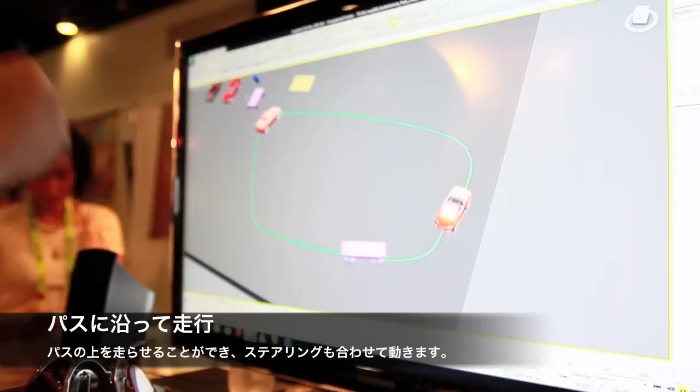And you can put cars on a path, and you will see the steering works automatically on the path. So you can draw any kind of spline and the car will correctly steer. You just have a speed for the car and then it will follow your path. So you can have a city simulation, have cars following a path, and steering, suspension, everything will work.

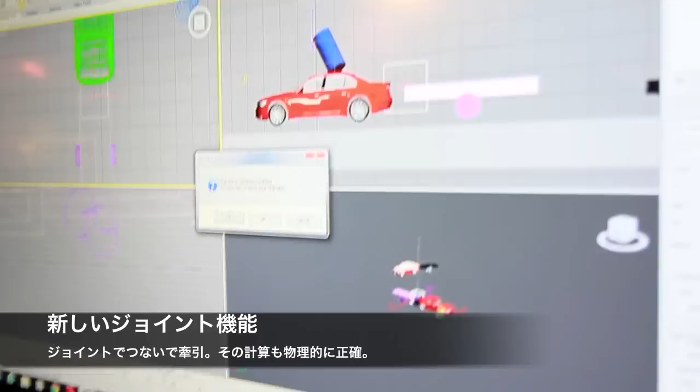We do support trailers, so you can have trailers with 2 wheels, 4 wheels, or as many wheels as you want. You just use the new joints where you can attach trailers to the car, and then you can have a camper or a huge truck and all kinds of stuff. Everything is physically accurate, so you have also the shocks and suspension as well. You can put unlimited trailers, so you can create trains and everything you like.

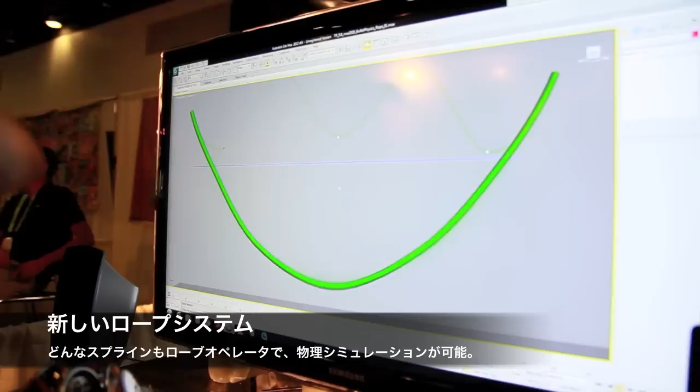Yeah, it's all procedural, that's our new rope system. It's the rope operator, so you can turn any spline into a rope - you just draw a spline on the ship, the ropes, power lines, any spline, you just pick it and it turns it into a rope. So it's very fast and efficient. Draw your object, build your stuff with splines, and you can attach objects to the spline.

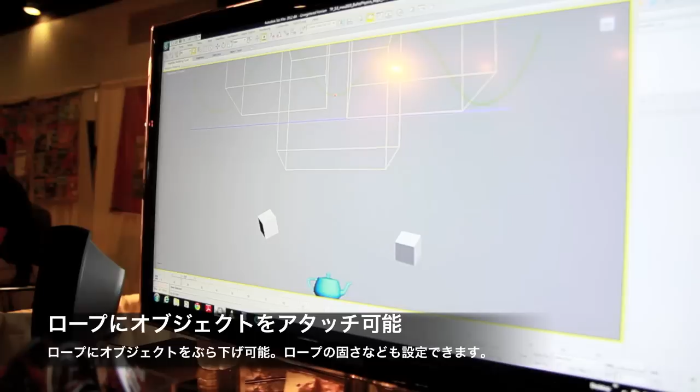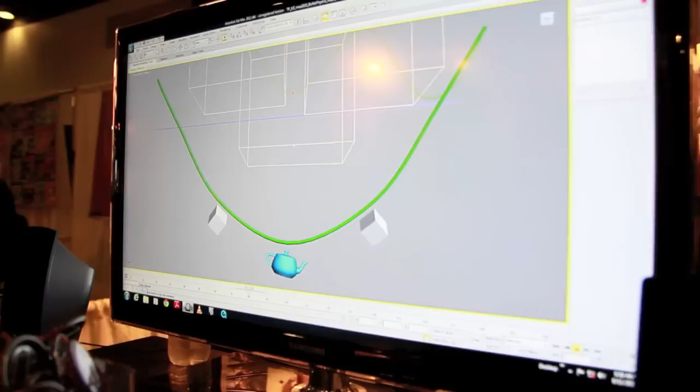And you can control how bouncy it is, how strong, all these aspects and parameters. So here's the damping, he's just changing the rope - now it's more stiff, no longer like rubber, more like a real metal chain rope. And now it's more like rubber again.

So here you adjust the rope. You can have a fixed start, so you have a rope like this, or you have a fixed end, then you have a rope like this, or you have both fixed, then you have like a string.

And we have other new features. We have RealFlow integration, so you can load RealFlow bin files. If you use RealFlow for fluid stuff, you can load them in, and then from this loaded data, you can spawn new particles and do all kinds of effects.

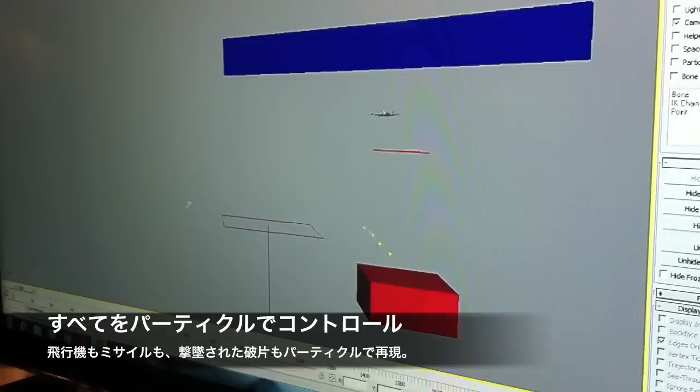That's another nice sample. We have particles, we have a rule searching for the nearest object. The particle will search and shoot, and when the rocket hits the plane it destroys the plane and you have trails falling down. So you can shoot a lot of rockets, and it will automatically search for the nearest object.

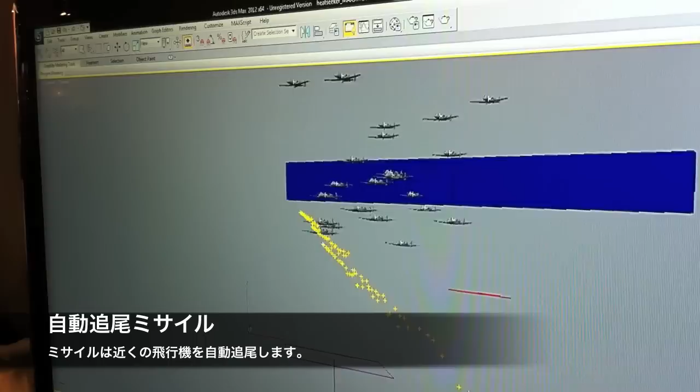So we have the setup where we have the airplanes created, particles, and how many rockets - so we can shoot now 20 rockets. We shoot much more rockets, so we are able to hit more planes, and each rocket will search for the nearest plane. So you can create this kind of setup really easily with Thinking Particles.

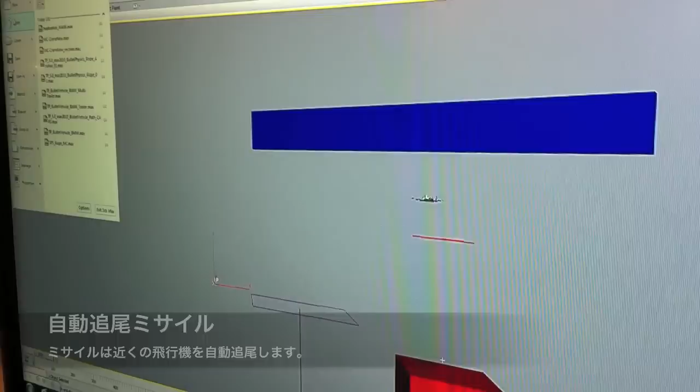We also have new joints, the bullet joints. They are much more complex than the joints we had in TP4, so you have much more control now where joints can fix and bring other objects with it, all controlled by the joint helpers. You see, you have the momentum going over. Then we have sliding joints, rotating and ball and sliding joints, so we have a lot of different joint types.

But the core is now in there, we have the bullet engine there. We need to stabilize it and then we can do great stuff. And it's really fast, it has multiple solvers - we have solvers for GPU and multi-threading, so it supports multiple cores.

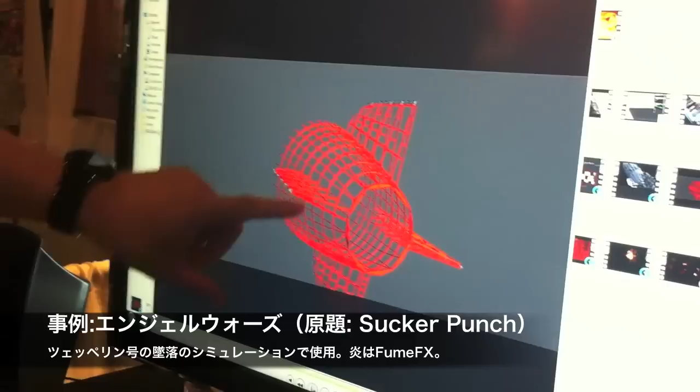So, on Sucker Punch, the Zeppelin sequence - all the steel frame of the Zeppelin itself was done with Thinking Particles. Pixomondo did this shot, they have a script that places the joints on the steel frame, and all the steel frame is done by Thinking Particles. So you can have the joints given a force when it breaks, so you can do really complex simulations with that.

And they even connect it with their cloth solution.

Yeah, that's a joint strength - you can make it like rubber or steel and all this kind of things, so you can adjust the strength of the joint.

So that's all the broken joints already, the steel there.

And that's the scene where everything burns, and this is done with FumeFX, so this is all computer generated. And that's the sequence in the movie where the Zeppelin crashes down - that's now the different layers, how they did it.